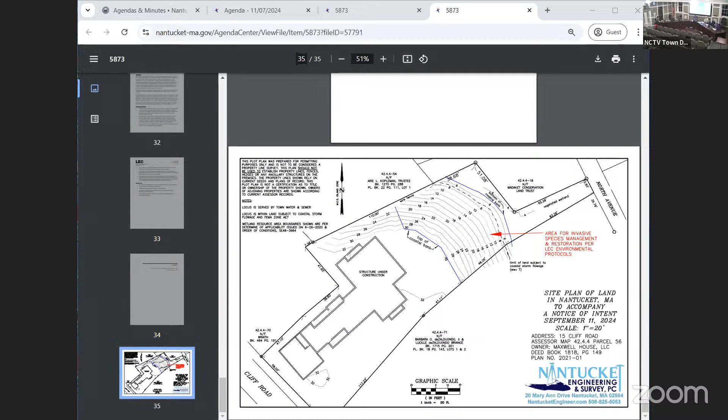Brian, good evening and welcome. Good evening, thank you very much. For the record, Brian Madden from LEC Environmental Consultants. This project was opened up. It's an invasive species management plan on a coastal bank, with some minimal invasive species restoration work within land subject to coastal storm flowage in the buffer zone to an offsite vegetated wetland. I think I had presented this two meetings ago, and we had continued

awaiting some feedback from DEP, which I understand Will had reached out and through some connections basically affirmed that an ecological limited project restoration is not really appropriate in this situation. I can get into more details on the management, but I think that's effectively what we were continuing to wait for DEP's feedback. Thank you, Brian.

So the feedback actually was sort of what you said, but it basically was that the commission retains discretion over projects to either hear them under the notice of intent or under the ecological restoration project, unless it gets flagged by DEP or meets the areal limits. So we certainly could hear this as a restoration project, but it's my opinion that if DEP doesn't require us to do so, there's no benefit, so we're going to allow this to proceed as a normal notice of intent. But the commission certainly does have discretion should it want to hear this project or any other project as a restoration project. It's up to them.

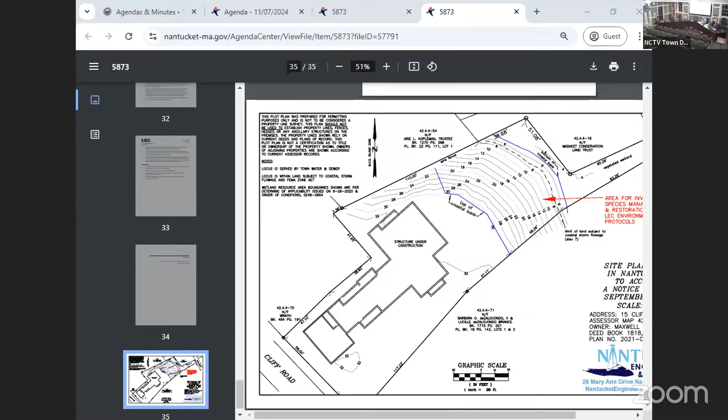Commissioners, anything else? Members of the public, any questions or comments? Seeing none. Brian, would you like to close? Yes, please.

Staff, do we have everything we need to close? Yes, you do. Is there a motion to close? So moved. Thank you, Mike and Joe for the second. We're all here in person, so we can do a vote just in favor rather than roll call. So all those in favor, please say aye. Aye. Any opposed? That carries unanimously. Thank you.

You can also let me know for the record that Commissioner Williams has joined at 5:09. I think you got to pull that one up. All right, then you get to sit on that plastic thing, I think.

While that's happening, we're going to move on to the next notice of intent, which is Muabessac LLC at 20 East Lincoln Avenue, SE 48 3814, also represented by Brian Madden. Brian, you're back up. Thank you very much. For the record, Brian Madden from LEC Environmental Consultants.

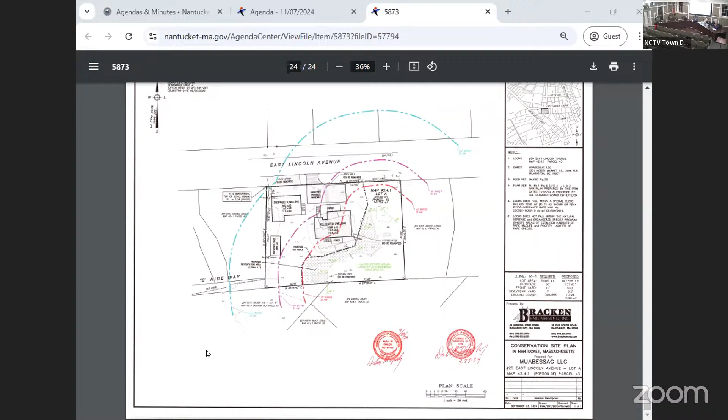I think, Jeff, I don't know if this is the most updated plan, actually, now I'm looking at it. Yeah, there's a supplemental plan where a patio was added. Exactly, yeah. All right, let's see if I can figure that out.

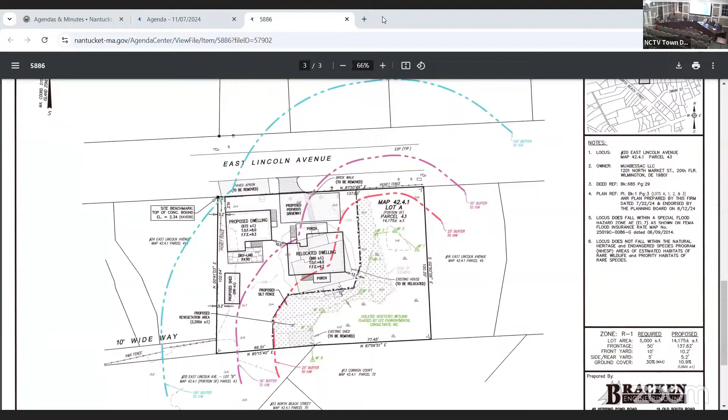There were some questions about the existing foundation and the reconstruction. The existing dwelling, and I included a photograph, has a first floor elevation at elevation 6. It has a perimeter crawl space, concrete crawl space foundation. There's some gaps or access points into the crawl space, but largely it's a block perimeter foundation. The back set of stairs and back porch is a solid structure of concrete.

What we're proposing to do is elevate the structure to meet zoning and flood zone standards. It's being elevated a little over 3 feet with the first floor elevation at 9.2. We're eliminating that solid concrete back steps porch area and the existing front porch, which is on sonotubes. The front and back porches will be elevated on sonotubes, and the foundation for the crawl space is going to be elevated.

There's going to be flood vents incorporated into the crawl space foundation, so the flood storage capacity and flood flow-through areas are going to be significantly improved under proposed conditions compared to existing. We've provided additional documentation showing the property will enhance the ability to absorb and contain floodwaters.

Again, we're increasing the wetland structural setbacks, reducing further the structural footprint within the 25-foot buffer, reconstructing the dwelling with flood compliant foundation, enhancing the flood zone interests, and providing 2,200 square feet of wetland buffer zone restoration enhancement. So I think we fit the waiver provision for the long-term net benefit, and we provided additional detail on revisions. I'll turn it over to questions.

Thank you very much. For the record, Brian Madden from LEC Environmental Consultants. This one was for proposed porch, reconfiguration of a stone patio, and reconfiguration of the existing driveway within the 100-foot buffer zone to BVW. Based on feedback we received at the last meeting, we've made some project updates.

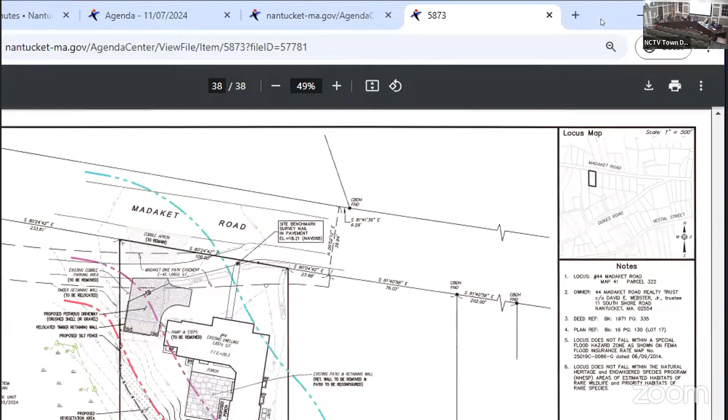We have another updated plan here. Basically, we were able to reduce the width of the driveway a couple feet. That pushed it off of the westerly property line and allows for an area where we're proposing a revegetated slope, on the west and south side of that driveway corner, upgrading the 25-foot buffer zone.

The original proposed timber retaining wall and the existing timber wall that's there right now is proposed to be removed. We've been able to regrade it in a manner that removes that structural element within the 50-foot buffer zone, but we are proposing to keep some edging along the perimeter of the driveway. Basically, that will contain the pervious material within the driveway footprint itself.

The driveway from south to north, moving towards Madaket Road, has a slight pitch towards the bike path, and we propose a dry well to capture any runoff before entering the bike path. That's in the northwesterly corner of the driveway. We are leaving a cobble apron within the easement abutting the bike path, as discussed at the last meeting. That's shown on the revised plans.

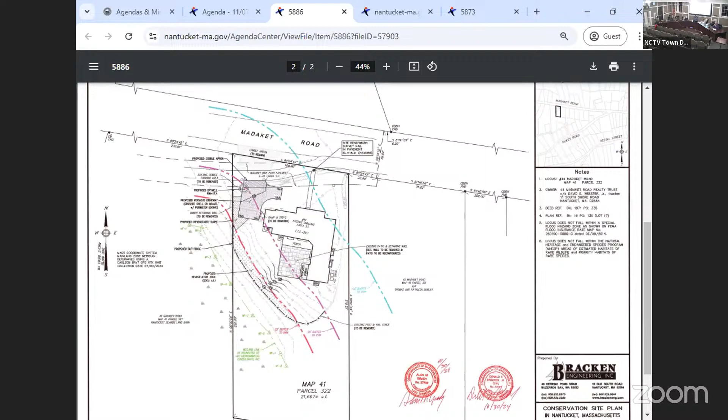Thank you, Commissioners. Linda, go ahead. I think I mentioned it last time, Brian, that you have to have an apron on both sides of that bike path, and you're not showing that. We are maintaining the cobble apron on both sides. Right, because it's just not shown here how you're getting from the north side of the bike path to the street. You can maybe zoom in up there, but I tried to do it here, and it got blurry.

It's complicated to see because the stippling isn't that different, but there is a cobble at the top, and then there's a cobble on the south. I just wanted to make sure. Yeah, we did look into that. We did incorporate it. So that transition against the bike path, there's cobble, there's that cobble apron.

Other commissioners? Seeing no questions or comments. Any questions or comments from members of the public?

Seeing none. Jeff, do we have everything we need to close? Yes, you do. Brian, would you like to close? Yes, please. Is there a motion to close? So moved, Mr. Chairman. Thank you, Linda. Is there a second? Thank you, Mike. Let's just do the voice vote. All those in favor, please say aye. Aye. Any opposed? That carries unanimously. Thank you, Brian. Thank you. All right.

And that will move us on to Madaket Land Trust, various properties, SE 48 3813, represented by David Haines. Good evening. Thank you all. Again, David Haines with Haines Hydrogeologic Consulting, representing the Nantucket Land Trust.

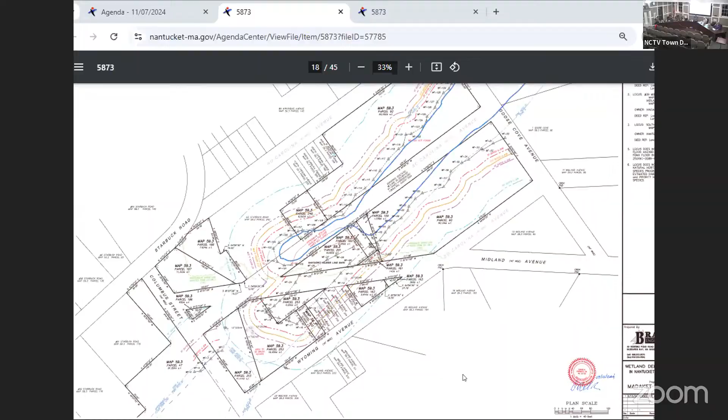Thank you, David. Any questions or comments from members of the commission? Seeing none, any questions or comments from members of the public? Also none. Jeff, do we have everything we need to close?

Yes. David, would you like to close? Yes, please. Is there a motion to close? So moved, Mr. Chairman. Thank you, Linda. Is there a second? Second. Thank you, Joe, for the second. All those in favor, please say aye. Aye. Any opposed? Abstain? That carries unanimously. Thank you. Thank you as well.

So now we'll be moving on to Nantucket Islands Land Bank at 19 Wauwinet Road, SE 48 3818, represented by Liz Phelps, and I think we need to promote her to a panelist.

Thank you, Mr. Chairman. Can you hear me okay? Yes, we can. Good evening. Good evening. Liz Phelps representing Nantucket Islands Land Bank on this application for 19 Wauwinet Road.

This is a 3.3 acre site that the land bank acquired in August of 2020. It was historically part of the Eat Fire Farm, Eat Fire Spring Farm that once comprised over 300 acres in the area. The area was subdivided in the 70s and residences were built. The land bank got a permit to complete restoration work at the site under SE 483560.

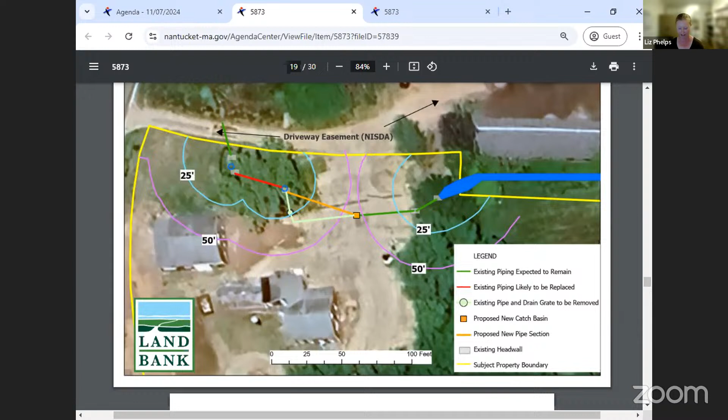That was for demolition of some structures, landscaping, and ADA accessibility. And then we obtained a second permit, SE 483636, to allow Fogtown Farm to operate a small scale lavender and berry farm at the property.

This application is requesting the repair of existing stream culverts on the site, which have increasingly become overwhelmed during high precipitation flooding events and require inspection and repair. Resource areas on the site consist of BVW and inland bank associated with the stream.

If you go to figure 2, Jeff, you can see the existing conditions. The stream basically comes off of the eastern wetland complex onto the property and flows adjacent to the NISDA barn into the culvert system on the western portion of the land bank site. It then daylights at two locations known as Eat Fire Spring, and from there is diverted again beneath the NISDA easement to a BVW. This system has been in place for many years, and it facilitates farm equipment moving from the site to the northeastern fields via the NISDA easement. There would effectively be no way to do that without that culvert system.

There is no natural heritage endangered species habitat located in the proposed work area, so no notification was required. And the area is not located within land subject to flooding.

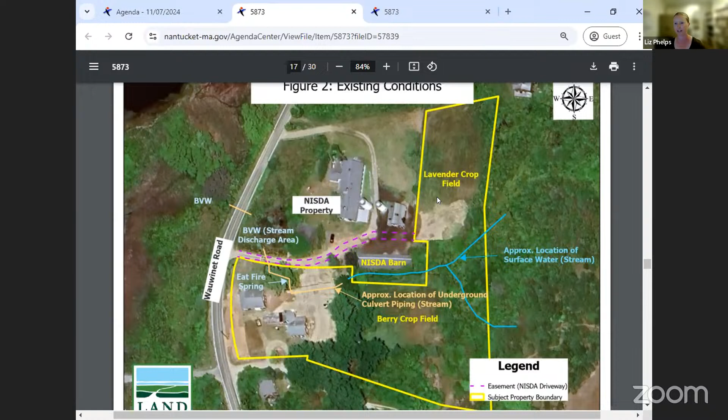So we're requesting this permission. If you want to go back down to figure 4, Jeff, we're going to leave but inspect the green sections on the property, not on the NISDA section, and then replace the red section. We are proposing to remove the section that's in light green. We would have to replace that anyway. There's a catch basin there and then piping.

We are proposing to replace it with the system shown in orange, which would be just a catch basin with a longer stretch of pipe that goes directly to Eat Fire Spring. That would eliminate maintenance issues and cause a better flow there, just a straight shot to the spring. After talking to Ernie Strang, he suggested that's the way we do it. So we're requesting permission to do that.

It's my understanding that this is a water dependent project, so I don't think we need waivers. But happy to answer any questions you might have.

Thank you, Liz. Any questions or comments from commissioners? We'll start with RJ, I saw his hand first. Thank you, Chair Engelborg.

I don't know, in looking at the definition of water dependent use, that this meets that standard, is my first comment slash question. My second one is to the other fellow commissioners: do we consider this actually a stream? Because there's a separate set of standards from Mass DEP with specific regulations when you're updating a culvert, like what the diameters have to be and how far down into the bed it has to be. So if we actually define this as it is in the narrative, as a stream, we should follow those regulations as well.

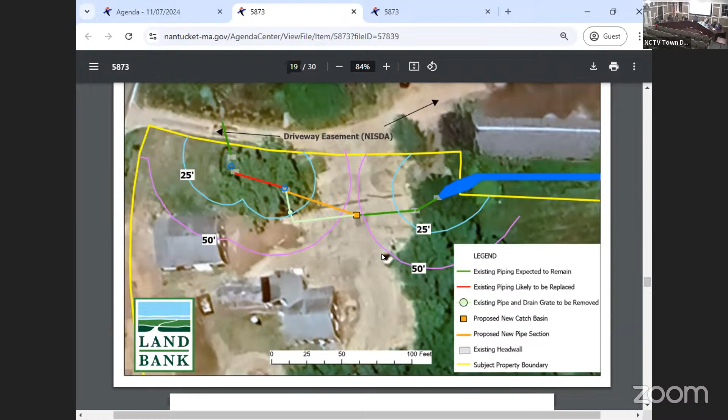Liz, would you like to close? Yes, please. So moved. Chairman, thank you. Is there a second? Second. Thank you, RJ. All those in favor, please say aye. Aye. Any opposed? Any abstained? That carries unanimously. Thank you. Thank you, Liz.

And next up is also Liz, representing the Nantucket Islands Land Bank at 181, 181R, 171R Hummock Pond Road. And you're up again. Thank you, Mr. Chairman. Again, Liz Phelps, representing Nantucket Islands Land Bank. This application is for our property known as Gardner Farm on Hummock Pond Road.

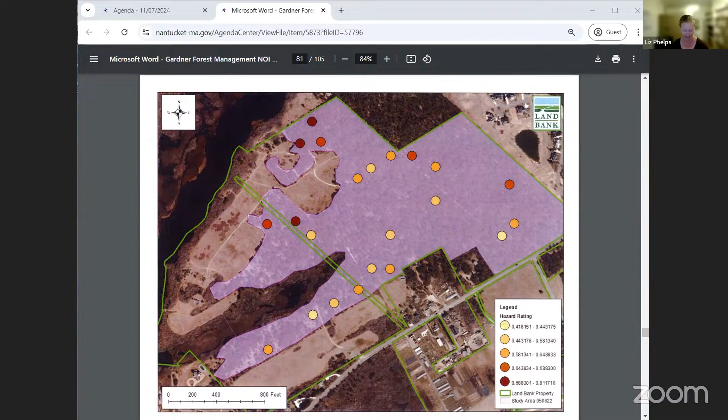The area is a conservation area consisting of trails and mowed fields. The land bank initiated conservation measures at the site last year, primarily in response to outbreaks or the threat of outbreaks from the southern pine beetle, or SPB. The pitch pines that dominate Gardner Forest are very dense and pose a high risk to SPB infestation. In addition, there's definitely a wildfire risk. Nantucket's Community Wildfire Protection Plan has identified Gardner as a priority management area where there's high fuel loads that should be treated.

SPB outbreaks have occurred on Martha's Vineyard as well as on NCF's Westgate property, which is less than a mile from Gardner. So the land bank has been working with Natural Heritage and with a licensed Massachusetts forester, Adam Moore, to develop a management plan for Gardner, basically for preventative tree thinning. We have submitted a habitat management plan to Natural Heritage for approval and a forest management plan to DCR for approval for this work. Forest plot surveys were conducted at Gardner, and from those surveys, Adam identified priority areas to be targeted. We've already done one phase that did not require ConCom permits because it was outside any resource areas.

Jeff, if you go to figure 2, you can see the areas that are subject to this application. It's primarily the western property, 181 and 181R Hummock Pond Road, but there's a very tiny part of the buffer that overlaps on the adjacent property, so we just included both properties. The resource areas on the site are marsh, bog, BVW transitioning to a wooded marsh.

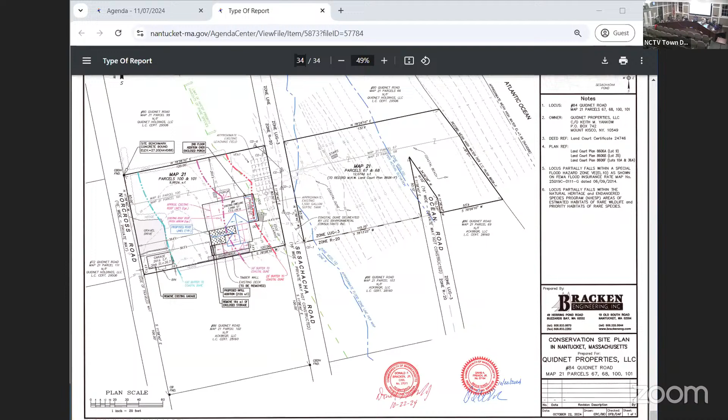All right, so that moves us on to Emirzian at 84 Quidnet Road, represented by Brian Madden. Thank you very much. For the record, Brian Madden from LEC Environmental Consultants. This project involves some structural improvements to the existing dwelling.

There's a coastal dune located immediately east that is flagged, and the 50-foot buffer zone goes through the central portion of the dwelling. What is being proposed is some series of vertical modifications to existing roof lines, some second floor additions over existing footprints. There's no foundation changes on that component, but the stippled area on the west central portion is proposed for a structural infill.

Right now there's an existing deck footprint in that location, and I included a photograph to show you what that looks like. But it's basically an entryway type deck into the dwelling that's proposed to be enclosed and become part of the dwelling. There's a small portion of the existing storage area, basically a connected shed to the dwelling, that's going to be removed, 16 square feet. And the garage up by the driveway is also being proposed to be removed.

That's just outside the 100-foot buffer zone. But the proposed structural infill, a small portion, does occur within the 50-foot buffer zone. There's new foundation work there to match the existing crawl space. So we are proposing a waiver for that work. It's about a little less than 60 square feet within the 50-foot buffer zone, on the west side, the landward side of the dwelling. That's not going to interfere with the functions of the dune. So we have requested that waiver.

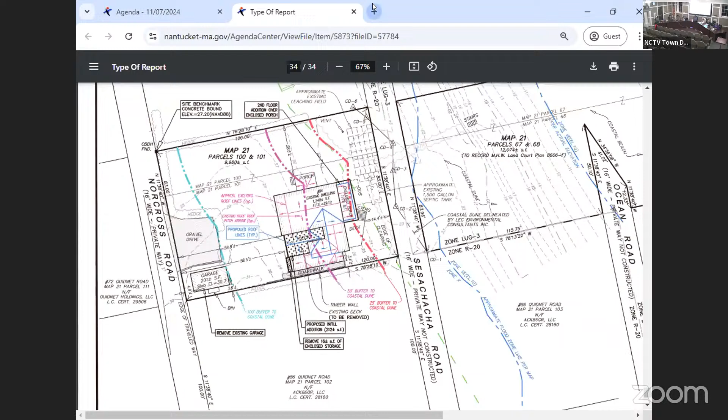Thank you. That will now move us on to Capri's Island Holdings LLC at 47 Crooked Lane, represented by Brian Madden. Thank you very much. For the record, Brian Madden from LEC Environmental Consultants. This one does not have a DEP file number. We are also waiting on natural heritage within the 30-day window, so we will be continuing. But the proposed project involves reconstruction of the existing single-family dwelling, the secondary dwelling, and installation of a new pool, patio, cabana, shed, garage, studios, and a septic upgrade, driveway reconfiguration, along with utilities, landscaping, regrading, and site work.

The proposed work activities occur within the 100-foot buffer zone. The wetland boundaries have been approved through a determination of applicability that was issued last year.

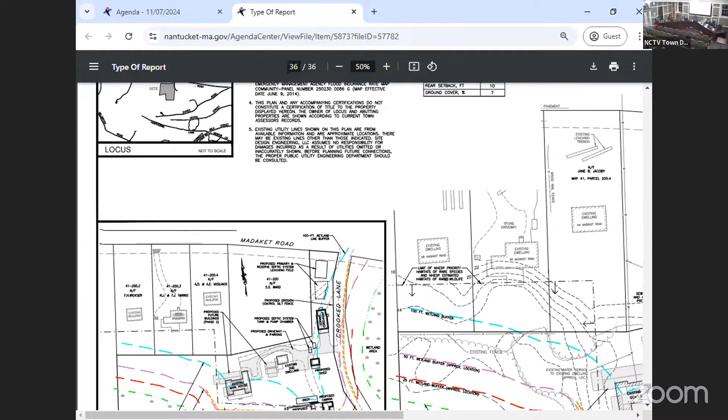The design has provided a good level of detail on the foundation depths and designs to ensure that we're 2 feet above high groundwater based on soil testing that's occurred out there. High groundwater has been documented between 9.3 and 9.8 elevation. So using the higher number, 9.8, I provided all the structural separations to the foundations, including the pool.

Which will also meet the 2-foot separation. The proposed work is all outside of the 50-foot buffer zone, with no structural components within it. The septic, located closer towards Madaket Road, is outside the 100-foot buffer zone. So no waivers are required for the proposed project, and I'd be happy to answer any questions.

Thank you, Brian. Any questions or comments from members of the commission? Okay, questions or comments from members of the public? Let's check the Zoom. Yes, please come up to one of the microphones, introduce yourself for the record, any connection you may have to the project, and then you can say your piece.

Hi, I'm Annie Mendelson. I have no connection with the project, I just was notified because I'm an abutter. I had a question about the pool being within the vegetated restricted area, and couldn't it be moved further north to be out of the vegetation area?

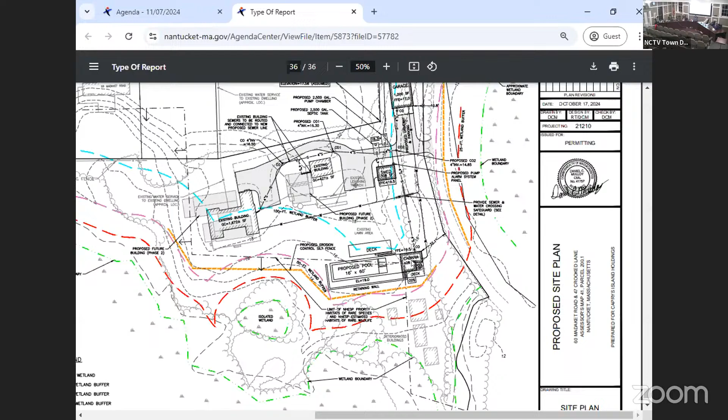Annie Mendelson again. Yes, go ahead. There's a driveway going to the Jacoby property that abuts this property. They have an easement in perpetuity, and it looks like they're planning their septic leach fields to be in that area, and I don't think you should be driving over a leach field. So I'm wondering what's going to happen with that. Yes, Mr. Madden, go ahead. Thank you. Yes, we are aware of the driveway easement, and the system is located north of it, so it's outside of the easement.

I would say too, there are plenty of leach fields that are underneath parking areas or driveways. We don't really have jurisdiction over what happens in the easement. That's more of a zoning issue, but I'm glad it's not in that area. But if it was, because that was the only location it could be, we've seen projects like that before. Jeff, go ahead. I would say that jurisdiction of leach field loading and things on top of that is within the discretion of the health department and Board of Health.

Okay, any other? Yes, go ahead, Annie. So sorry. No, you're fine. The leach fields are right next to the pond that's across the way, across Crooked Lane. And I'm wondering if there's any way they could be moved further away from the pond.

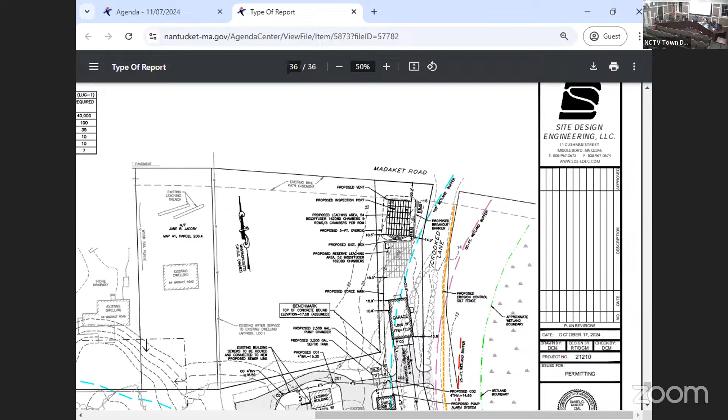Thank you. Any other members of the public? All right, so we assuredly don't have everything we need to continue on this one, or to close on this one. Would you like to continue to the 21st of November? Please, that will continue to November 21st. Thank you.

We'll now be moving on to Capri's Island Holdings LLC. No, we just did that one. Syracuse at 2L Street, represented by David Haines.

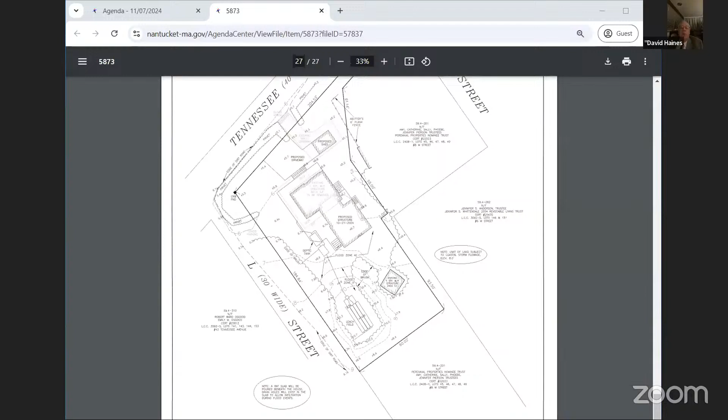Good evening again, thank you. This is 2L Street in Nantucket, right off of Tennessee. The proposed work includes removal of the existing house and construction of a new house and shed. Most of the work will occur within land subject to coastal storm flowage or its buffer zone. The site is outside of any natural heritage area, so no review by them is required. The site is on town water and has its own upgraded septic system, recently installed.

The house will be constructed above the flood elevation on a concrete foundation with flood vents and floor drains, 6-inch floor drains, 8 feet on center, discharging to a layer of gravel below a rat slab, so you will not lose any capability of infiltration or loss of flood storage. No great regrading is proposed of the site. The driveway will be reconfigured slightly, and all disturbed areas will be loamed and seeded upon completion of the work. The foundation will be a frost wall and a crawl space beneath the house, with no basement.

With that, if you have any questions. Oh, it does have a file number. We received a DEP file number today, SE 482821. The DEP system was pretty busy this afternoon.

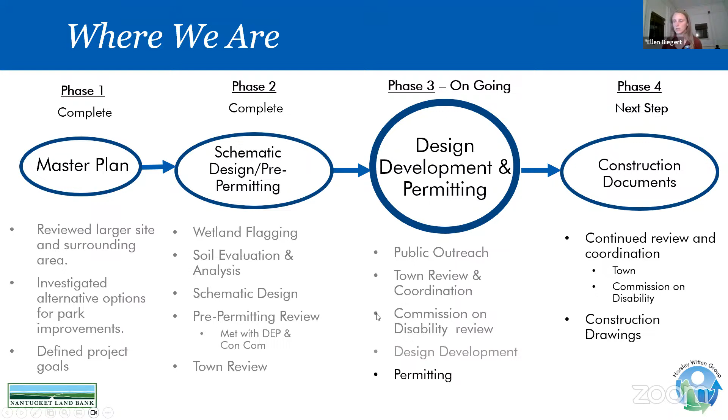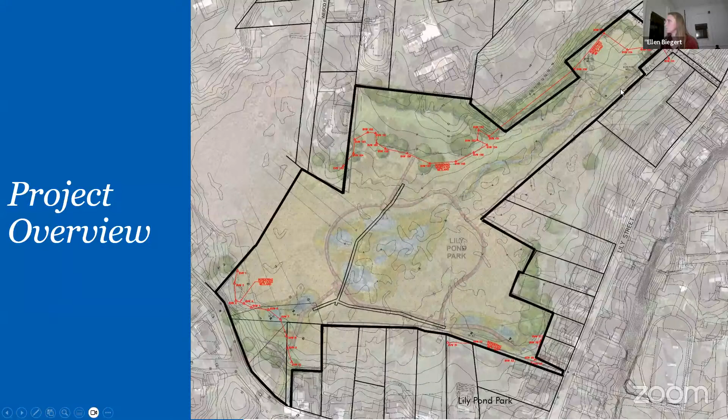So just some of the benefits: we would be looking to improve water quality. Like Rachel mentioned, currently the wetland is a location where a lot of the surrounding community drains into it. So at these points where it's draining into the wetland, we are looking to capture some of the water and clean it before it continues into the rest of the resource.

Habitat enhancement—creating more diversity in topography in the wetland so that we have some hummocks and standing water in these locations. And then access points and an accessible boardwalk into the wetland.

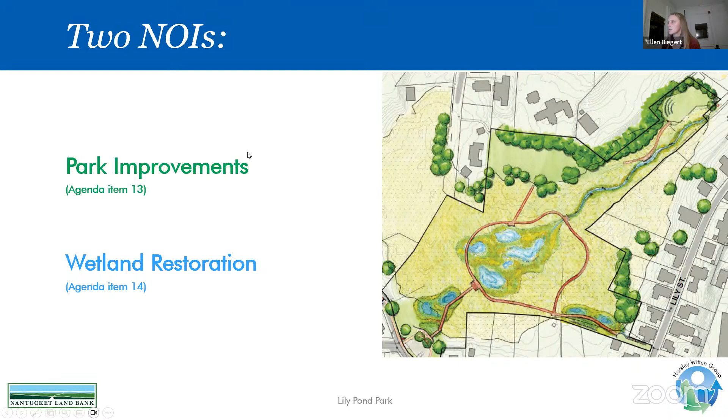Like we mentioned earlier, we are presenting for 2 NOIs within this one site, so we broke those down in the next few slides to explain them separately. For the park improvements NOI, this is really related mainly to the entrances and upland areas, as well as the boardwalk to get throughout the site. This isn't exact because there is some shared with temporary disturbances, but for the most part this is generally what's represented in the park improvements.

So, site access, the new trail system, stormwater management—everything we're capturing upland before we let it continue into the resource area—signage, and then wetland replacement.

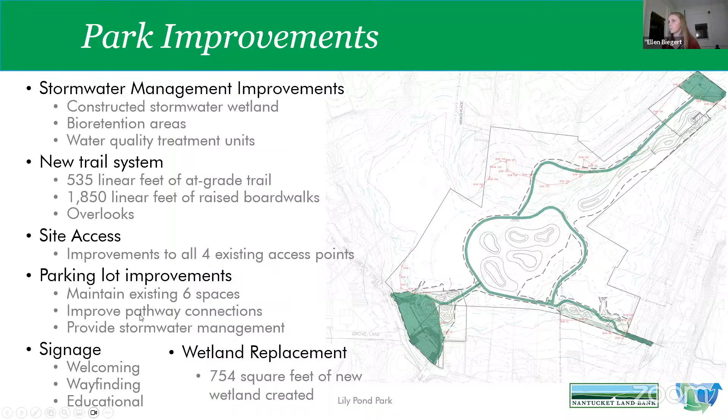And then the wetland restoration one, really invasive species management. So there's currently an NOI out for the invasive species management that's currently going on in the park, but this would be continued throughout construction and then monitored afterward, as well as the restoration area in the center.

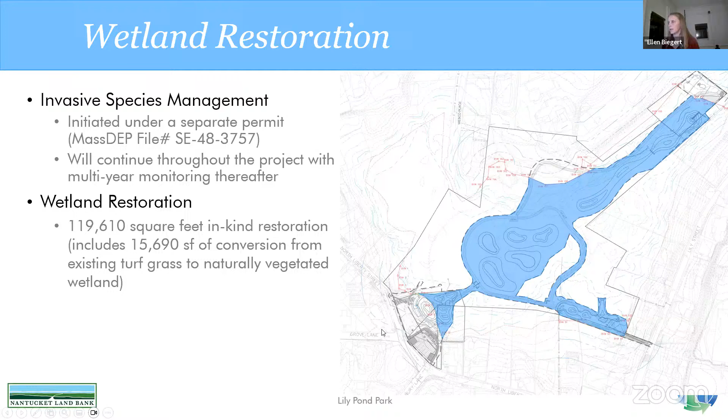And then I will pass it to Jamie. Thank you, Ellen. So as Ellen just broke it down for the different activities for each NOI, the reason for their separation is because the impacts for restoration exceed thresholds. So for those to be filed in accordance with the Wetlands Protection Act, they need to be filed as an ecological restoration project. However, the entire project overall does not qualify as ecological restoration. The park improvements elements, as Ellen just described, are under that separate NOI for that reason.

So some of the temporary impacts, as you can see with constructing the park improvements, are going to be applied to both projects. And since both projects need to have some temporary impacts due to construction access, material stockpiling, those impacts are split between the two. And then permanent impacts specific to park improvements are listed in this table below. You'll see that the bordering vegetated wetlands impacts will permanently impact 694 square feet, and that is why there is a wetland replacement area for 754 feet, which exceeds the 1-to-1 mitigation ratio required under the Wetlands Protection Act.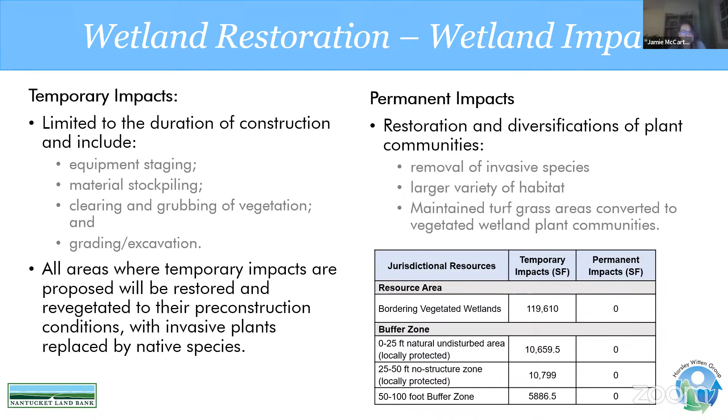And there's been a lot of mitigation measures, including the project planning that Ellen described up front. A lot of instruction, a lot of comments went into the design of this project so that it met the needs of the community and also the regulations under the local commission and at the state level. The construction period measures we will be implementing include erosion and sediment controls, pollution prevention measures, tree protection measures, and invasive species management as additional mitigation that's going to really enhance the overall site's functionality, both ecologically and for wildlife at the site.

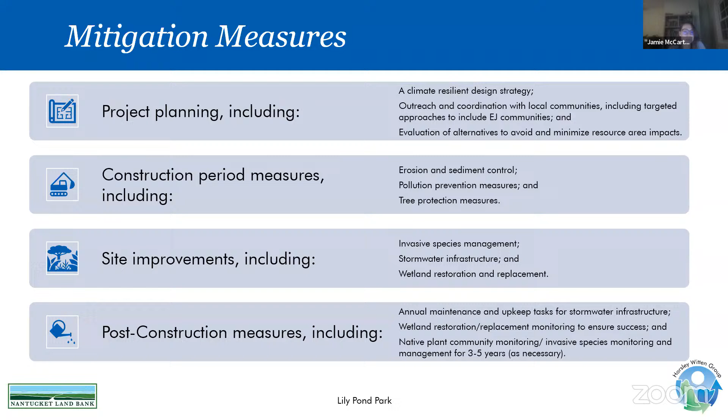And there will be post-construction monitoring as well, to ensure the success of all the native revegetation, including within the wetland replacement area.

And so this is our overall timeline. The invasive species management has been underway since September 2024, under the previously approved NOI. That will continue throughout the length of this project and into post-construction. Wetland restoration will be next, followed by the stormwater management, followed by the trail system, and then ultimately the site stabilization. This timeline will include a 3-month break during the busy summer months so as not to interfere with tourism.

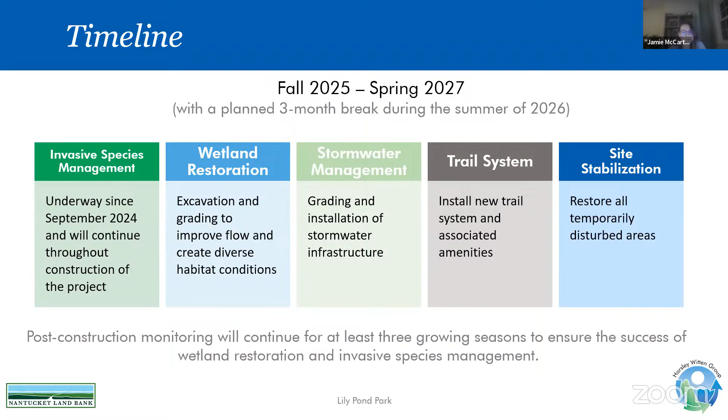Okay, so with that, I think we can go ahead and open it up for questions. Thank you all. Questions or comments from members of the commission?

Yes, Mike, go ahead. Just a comment. Looks like a great project, and glad that things will be improving in Lily Pond Park.

Thank you. Yes, Tim, go ahead. Maybe a dumb question, but tell me about how the water is treated and what you're trying to improve. I'm just curious.

Yeah, so for the most part, what we're using to treat it is hydrodynamic separators or treatment units that'll be underground. There is one at the end of the parking lot.

Pull up a plan, just reshare. So the plans that were submitted have been advanced since this one, but for the most part, at the pipes coming into the park off of North Liberty Street, there are some underground treatment units that will help with some of the sediment and pollutant, as well as coming off of Lily Street. For North Liberty, the parking lot is sent into a bioretention area, and then water for the smaller storms that go through the separator will also go into a small constructed wetland before overflowing. And then larger storms, when the constructed wetland, which is just uphill of the existing wetland, will continue out to where it is going right now.

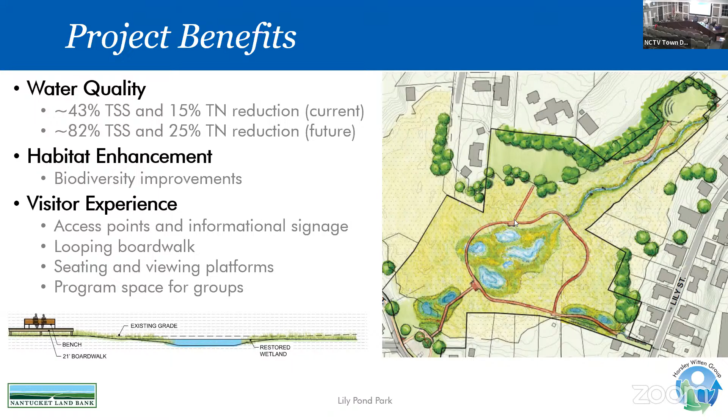Right now, all of that area is wetlands. I mean, it's just wet, and the water goes everywhere. So all of a sudden, if we're now funneling it down to the Lily Ditch, and it does not have the capacity to do that in a very big storm, then it's going to flood all of those properties. And that shouldn't continue to be our problem as homeowners there. So I don't really know what the answer is.

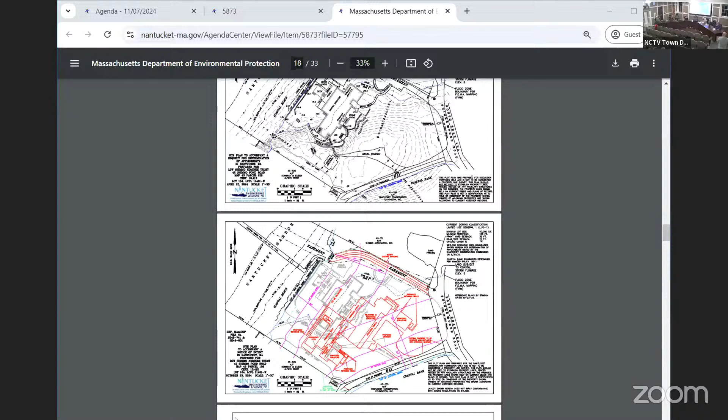Art Gasbarro, Nantucket Engineering. I'm before you tonight with a notice of intent application for a residential redevelopment project for a property at the north end of Shimmo Pond Road, fronting on Nantucket Harbor. This particular property has been residentially used and developed since well before the enactment of the Wetland Protection Act.

On the plan shown in front of you, on the northwest side of the property, we have the harbor, coastal beach, and then coastal bank. On the southeast side of the property, on the opposite side of an existing paved driveway, is a coastal bank, a heavily vegetated landform that comes up from Pest House Pond and is a jurisdictional coastal bank by policy 92-1. All of the resource areas we're discussing tonight have already been reviewed and approved under an earlier determination of applicability by the commission.

The property also contains land subject to coastal storm flowage, the boundary of which essentially runs through the middle of the house and up along the existing driveway on the northwest side of the property. What we're proposing to do is to pick up that existing house and move it to the southeast, up to a higher portion of the property, getting it out from within the current 50-foot buffer zone, removing it from the flood zone, and then renovating and improving that house.

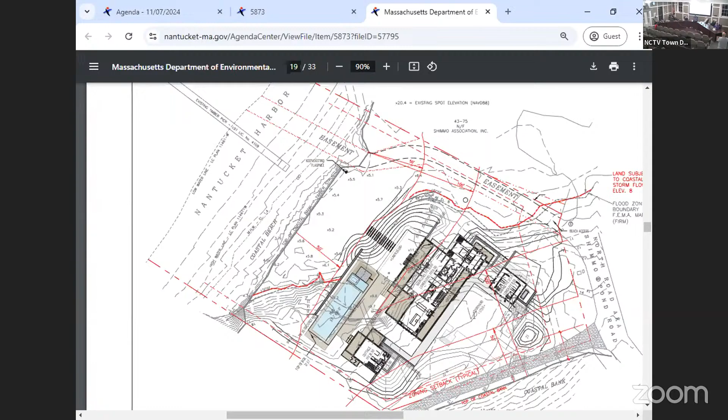No, Mr. Chairman. If you were to flip back, the proposed silt fence limit of work is shown in green on my plan, and we have held that. I'm sorry, are we talking about there's 2 driveways—perhaps that will help. There's the driveway within the easement on the northwest side, and no, that all exists. That's actually getting reduced from what is gravel right now—that little strip you see down the middle would become grass, with shells or shell gravel mix, compared to what's all gravel right now. It's actually getting a little bit narrower, so it's not getting any closer to the resource area. That's an existing beach access way—it's where it dumps, but it provides access, pretty much on that northwest side at grade there.

Okay, thank you. Other commissioners? Questions or comments from members of the public? Seeing none. Art, you said we don't have everything we need to close? We're waiting on a file number. Okay, yep, so I don't have one. Would you like to continue to the 21st of November? Yes, please, I will continue to November 21st. Thank you. Thank you as well.

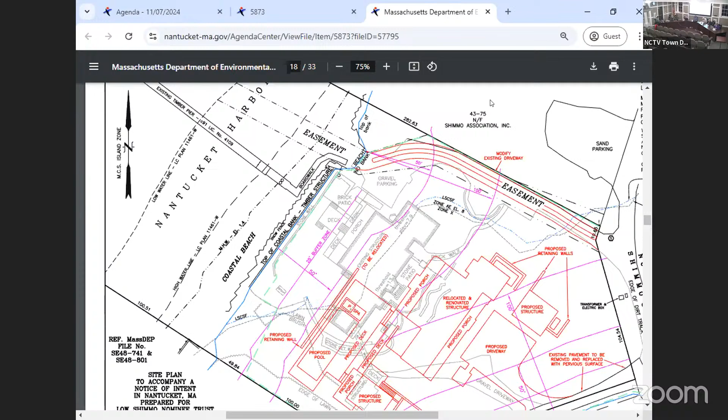Paul, good evening. How are you? Good evening, thank you. For the record, Paul Santos with Nantucket Surveyors, on behalf of the applicant, Sayle 99 Washington LLC, for a property located at 103 Washington Street.

About three or four years ago we were before the commission and did some improvements involving the addition of a loading dock and an exterior cooler, both completed. Subsequently a COC was issued by the Conservation Commission, and we are now back with this new notice of intent.

The plan is to do some upgrades to the property. I'll start at the westerly side of the building. The front entry porch, what is now the front entry when you walk into the building, the intent is to enclose that area. There are architectural plans in the set too that I'm sure you can take a look at, but the intent was to enclose that front area.

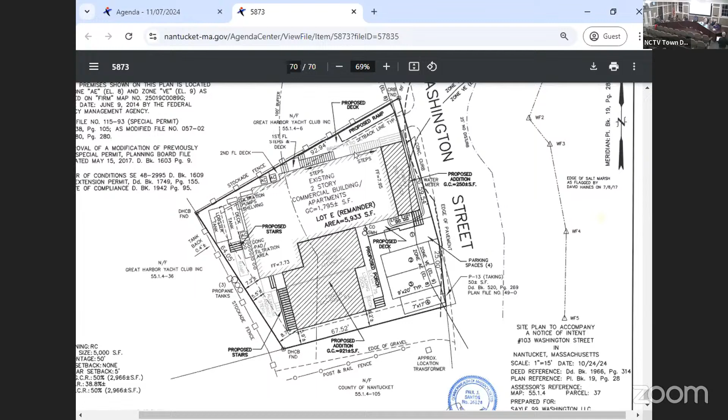Thank you, Paul. Questions or comments from commissioners? Okay, questions or comments from members of the public? Seeing none, do we have a file number for this? I'm tracking it right now, and as of right now I still don't have any confirmation that I do, so.

Would you like to continue to the 21st of November? I would not like to, but I'm going to be forced to, so yes, we're happy to continue. Well, sorry to ruin your day. That's not your fault. DEP is going to make you continue, I think there's been a switching of the signing for the 21st, so everyone we usually go to today was not available. So we've got someone else now, we'll start tracking when this happens again.

All right, well this will continue till November 21st. Thank you. Okay, thank you. That concludes the notices of intent.

We'll move on to amended orders of conditions. I'll start with Waterfront Pocomo LLC at 17 Lauretta Lane, SE 48 3542, represented by Art Gasparrini.

Thank you, Mr. Chairman. Arthur Gasparrini, Nantucket Engineering for the applicant. Perhaps if we could have the plan up, I think it might be helpful. I am in front of you to request an amended order of conditions, and I tried to use some colors on the plan, which you probably see in your packet, to hopefully make clear what's happening here.

Essentially, we had an approval and order of conditions for the removal of the existing structures and construction of brand-new residential structures. Instead, the applicant would like to continue to use the structures, not remove them. The approved features are shown in magenta, the existing are shown in gray-black with cross hatching around them, and the proposed changes are shown in red.

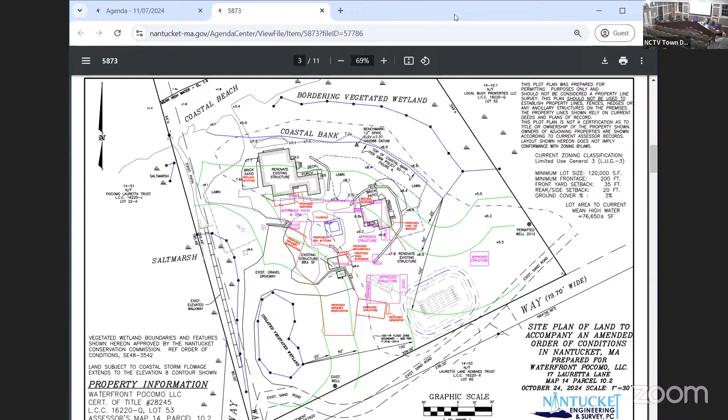I was a little torn, honestly, on the new application versus doing this as an amendment. My sense was that it remained a residential sort of redevelopment project, and it was so much because we were going to a lesser intensity of work, but it still was related to essentially residential redevelopment, if you will, that that was the appropriate way to do this. My concern at this point with a new notice of intent is the timing that would lead into, and I would respectfully wonder what really would be the difference in what comes out of the commission. The applicant would get a benefit of more time, perhaps with a brand new application on the back end of the permit, but that's really not what we're looking at with it being minimized.

And I believe the same conditions, I saw that Mr. Carlson just had it up. I have the previous order here from before as well. And I believe all of the limit of work hasn't changed, if that also helps you, Mr. Chairman. We have not expanded at all what was the approved limit of work. So we're working essentially inside of what was the approved silt fence. So I think we'd go through all this other process, another set of filing fees, notices, time back on your agendas. And I think the order of conditions that you would issue would have the identical conditions of what this amended order would contain, would just be my take. So I'm not sure, respectfully, what the benefit would be of that.

Thank you, and I understand the reason it was filed this way. I've already said my piece, so I'll go to the commission's discretion. Maybe we'll hear input from staff too, and then we'll make a decision, but I agree it could be heard this way. I just don't know if it's the best way to proceed. Jeff, go ahead.

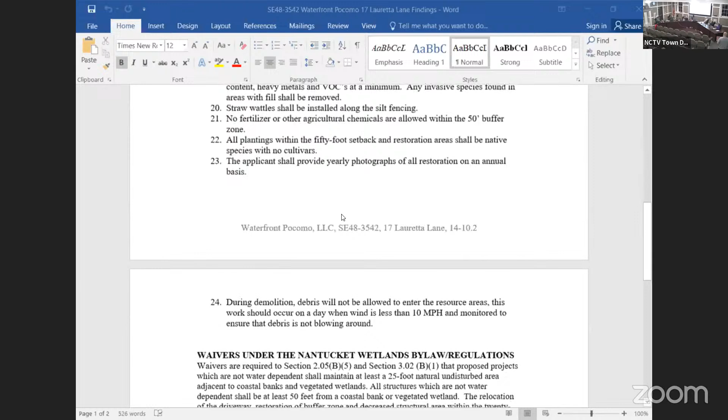Sorry, let me just get that out of the way. So we had the permit overview before, which describes the work. The only finding of interest was that no coastal engineering structure of any kind shall be permitted on an eroding bank in the future to protect the project allowed by this permit, except those allowed by waiver. I won't go through everything. As far as conditions go, pretty standard conditions for us. I think the interesting part here is, I mean, it's old enough. Well, I think 24 is fine.

The waiver, obviously, if we look at the amendment that's here, references sections that don't really exist anymore, which can be updated to correct those. As far as the difference between an amendment and an NOI, for my input on that, I definitely hear what everyone's saying. I think if it's helpful for everybody here, the difference between the two is pretty minor, right? So when you do an amended order of conditions, you notice the abutters, you have a requirement to advertise in the paper, and there's an appeal period at the end, specific only to the elements included in the amendment. Under a new notice, obviously, everything would be appealable.

I think some of these are splitting hairs. I kind of agree with Art personally that a cleaned up plan that just shows the new elements only would be helpful. I also hear what Seth's saying too, that it's cleaner. Sometimes it's not always clean. I'm happy to answer any other questions too. Yeah, Linda, go ahead.

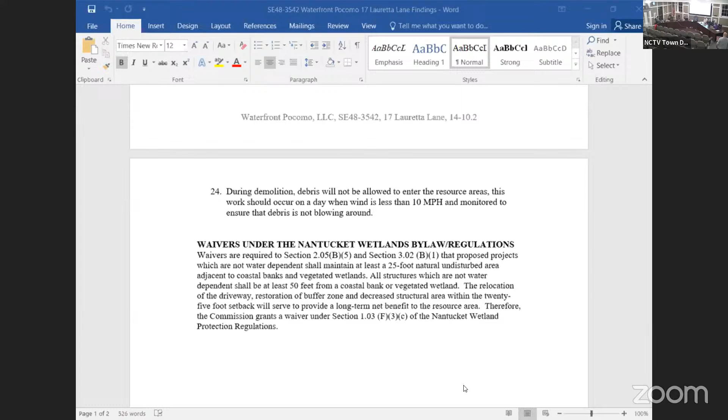One question, go ahead. Mr. Chair, will this site visit, because of daylight savings, be at 3 o'clock? Yes, we know we can work this out, but just so we're clear, 3 o'clock. Okay, thank you. I wish daylight savings time got abolished, but unfortunately, we're not there yet. My kids and pets agree with abolishing daylight savings. So I would request a continuance to the 21st and the site visit. Thank you. Yeah, the site visit will be on Monday, the 18th at 3 p.m.

We'll see you there. Thank you.

And we'll continue this application to the 21st.

That being said, we'll move on to Squam Partners LLC, 89 Squam Road, SE 48-3674. Still represented by you. Thank you, Mr. Chairman.

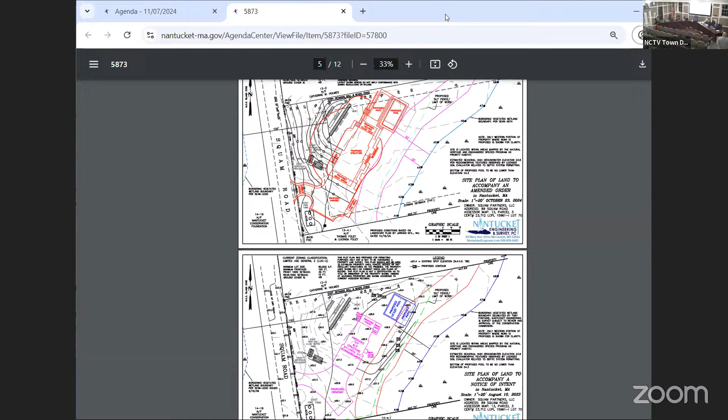So this project is essentially residential development on the west side of this property, where we had approval for a cottage and a swimming pool. The amendment is basically a refinement that has occurred in the design process since the initial application was approved. The residential structure itself is the exact same footprint. The swimming pool got a little bit larger but remains outside of the 50-foot buffer zone. The bottom has not gotten any closer to groundwater, so we are maintaining the same elevation as what was previously approved.

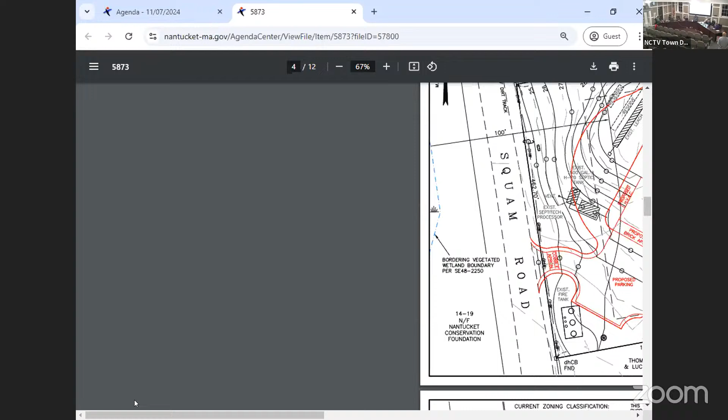The driveway got, I guess I would call it improved, refined, so that it will actually work. We essentially had an architectural design and not a landscape design when we did the initial permitting, and they brought in a landscape designer. The extent of the work, the silt fence has not moved. Again, I thought this was appropriate as an amendment and not a minor mod, to talk about that distinction, because of the change in the size of the pool. That was really the driving factor in my mind as to why I filed it this particular way.

I think we also had filed a landscape design plan as well. So this plan shows your structural elements, again, remaining outside of the 50-foot buffer zone. With that, I'd be happy to address any questions or concerns.

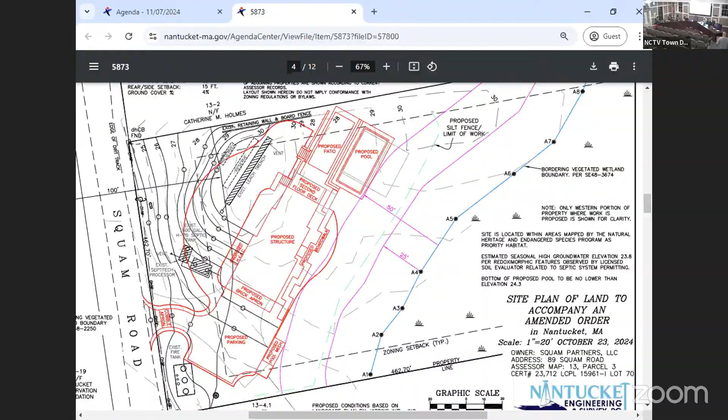Questions or concerns from commissioners? Okay, questions or comments from members of the public? Seeing none, is there a motion to close the hearing and issue the amended order of conditions? So moved, Mr. Chairman. Second. All those in favor, please say aye. Aye. Any opposed? Any abstain? That will carry unanimously. Thank you. Thank you as well.

Now we'll be moving on to the public meeting. We don't have any requests for determination of applicability tonight. We'll move on to minor modifications. We have 39 Monomoy Road LLC at 39 Monomoy Road, SE 48-3657, represented by Brian Madden.

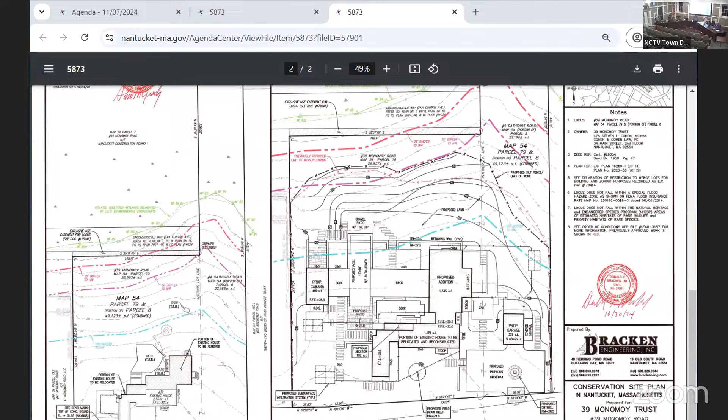Thank you very much. For the record, Brian Madden from LEC Environmental Consultants. This was an order that was issued in July 2023. Work is ongoing, and the proposed project updates include reconfiguration of the approved patios, decks, pool, retaining walls, along with some corresponding regrading and landscaping updates. All structural work is outside the 50-foot buffer zone. And that basically reviews it all.

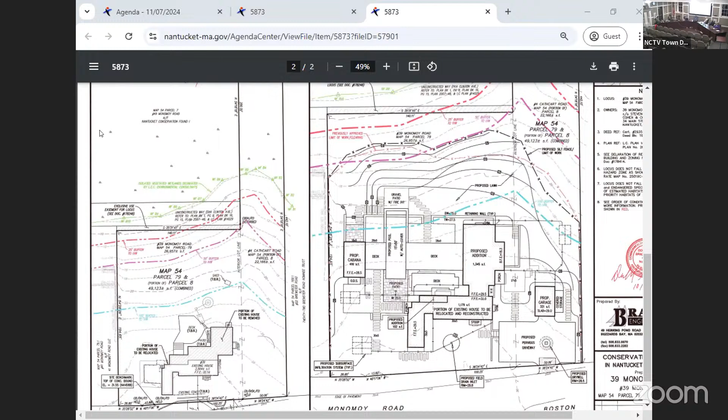Turn over to questions. Any questions or comments from commissioners? Would somebody like to make a motion to issue the minor modification? So moved, Mr. Chairman. Second. All those in favor, please say aye. Aye. Any opposed or abstained?

That will carry unanimously. We'll move on to the Ocean Avenue Nominee Trust at 20 Ocean Avenue, SE 48-3777, still represented by Brian. Thank you. Brian Madden from LEC Environmental Consultants. This was an order that was issued June of this past summer.

For proposed site improvements within the 100-foot buffer zone to coastal dune. Project updates include reconfiguration of the approved retaining walls, relocation of the AC units on a gravel pad, and relocation of the outdoor shower, along with some corresponding regrading, utility, and landscaping updates. Again, similar, all structural components of this one are outside the 50-foot. I'll turn it over to questions.

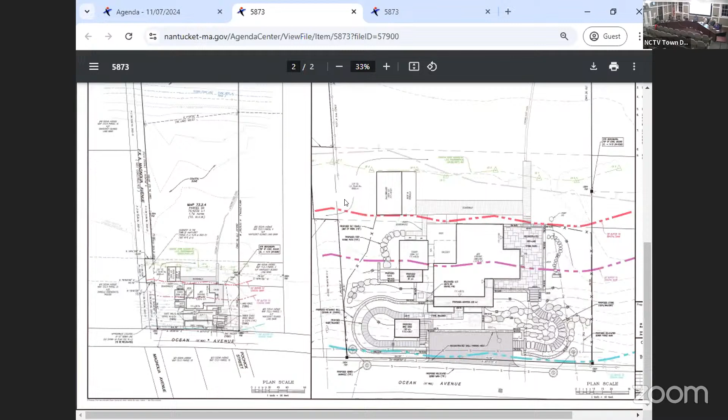Thank you, Brian. Questions or comments from commissioners? Would somebody like to make a motion to issue the minor modification? So moved, Mr. Chairman. Second. I think we're going to take Mike for that motion, second, and Linda for the second. All those in favor, please say aye. Aye. Any opposed or abstain? That carries unanimously. Thank you very much.

Thank you as well. And that will move us on to certificates of compliance. Start with Jen Sankey Lighthouse Trust, 37 Sankaty Head Road, SE 48-3608.

Jeff, are you doing this? Yeah, I'll take it. All right, go ahead.

So this project was originally - I'm not talking into my microphone like I'm supposed to. So this project was originally for some renovation to the structure. Sorry, I'm just trying to pull up my notes. Back in the olden days, I could just remember, but I'm getting old.

This was for a pool and patio and a spa area and a slight relocation of the structure. The pool and patio were not constructed, and there's no desire to construct those. The rest of the work is done. The only minor change is that they shifted the spa on site slightly further south, and it moved it out of jurisdictional area, so we didn't make them come back for a minor mod for that. Other than that, we're recommending this can get issued, and with the pool being gone, those pool conditions don't need to be carried forward.

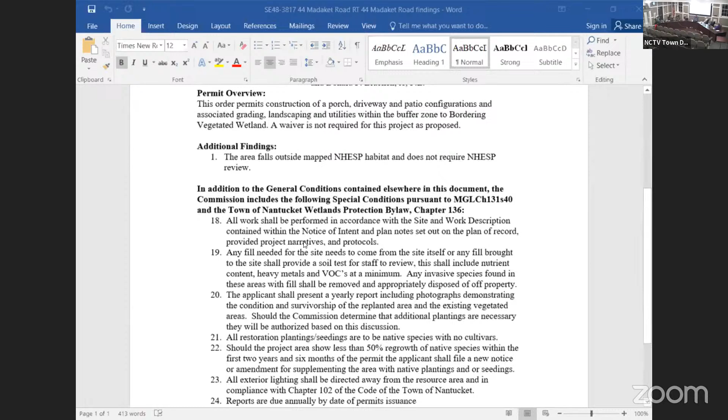Sorry, I don't believe that. I'm not sure about the drainage. No, I'm not either, because I think this requires waivers. Oh, yeah. And I am recused from this one.

Which one is this? 44 Madaket. I guess from our end, and I sincerely apologize for this, this is my fault for getting to it late today, so we have to deal with the switch. I guess I may just ask if we just carry this one forward and we'll deal with the corrected draft, because I agree, remembering that project, it did definitely require a waiver. Especially with the edging that's proposed and all that fun stuff.

Yeah, sorry about that. That may have just been in the midst of getting drafted when we switched humans. So we're gonna hear this one on the 21st, not the 22nd. Yeah, we'll have the correct draft. Sorry to Brian, it will be a little slow.

Okay, so then we'll move on to Madaket Land Trust at the various properties. And you want to put that up and go over this one?

There wasn't a lot of stuff on this one. Sorry about that, guys. Oh, you're good. Did I get the right one? No, I did not. All right, I feel better about that now, but now I need to go back to Zoom. And get the share right. Man, I need to just come and practice from time to time. I'm rusty.

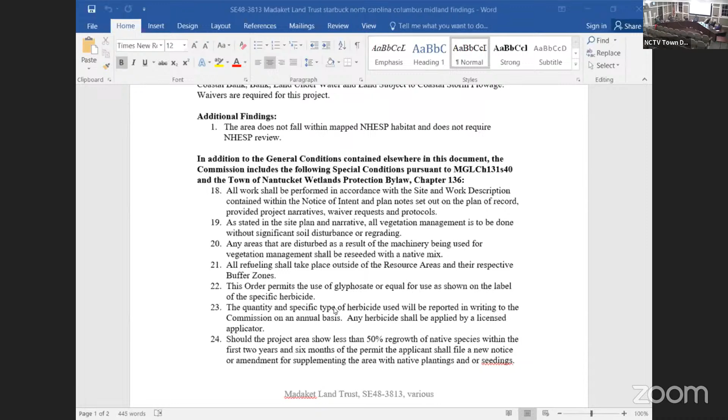So I know we've kind of done similar projects. We just want to memorialize that there's not to be significant soil disturbance. Any areas disturbed as a result of machinery need to be reseeded with the native mix, refueling outside of the resource areas and their buffer zones. Permits the use of glyphosate as requested with our normal herbicide reporting requirements. And then we included the 50% regrowth of native species just to keep track and make sure that any of those invasives don't come back in.

And then I feel like that's how it's more normally written, that all reports are required annually until a certificate of compliance is issued, then annually by the date of issuance or on the anniversary of the permit.

While he's typing that up, any other questions, comments, additions?

Is there a motion to issue the order of conditions as amended? So moved, Mr. Chairman. Is there a second? All those in favor, please say aye. Aye. Any opposed or abstain? Nope, that will carry unanimously.

Now we'll go on to 19 Wauwinet Road, the land bank, SE48-3818. Jeff, put it up and do the overview.

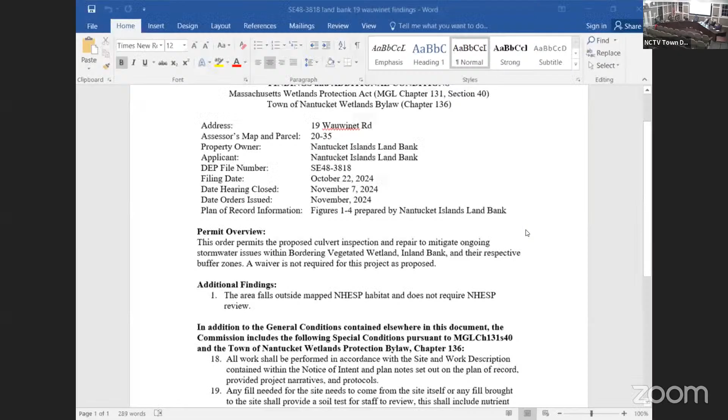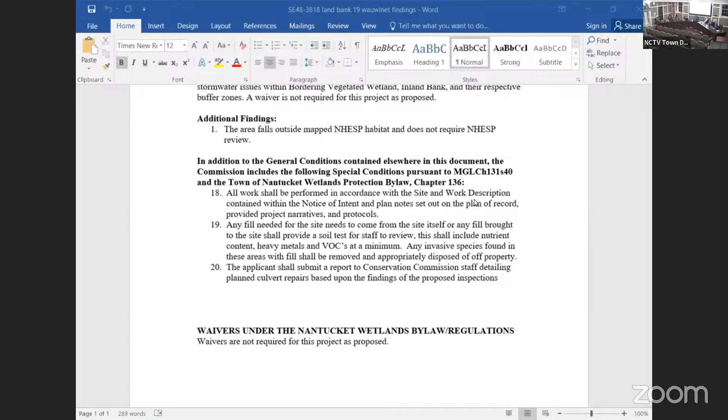So this was the culvert inspection and repair project, which I would love to have that discussion at a later date and time. We're definitely going to. But the only condition that I know Will had put on was to have a report detailing the planned culvert repairs, based upon the findings of proposed inspections. Open to any other findings or suggestions. Do we usually specifically say that we found it's a water dependent project, or we don't? We certainly can. We could wordsmith it really quickly. I know it came up in the hearing.

Anything else? He'll get there. Don't worry. That's just an R next to E. We do check all of these for grammar and spelling before we print them off finally, too, but.

Okay, anything else? Is there a motion to issue the order of conditions as amended? So moved, Mr. Chairman. Thank you. All those in favor, please say aye. Aye. Any opposed or abstain? Nope, that carries unanimously.

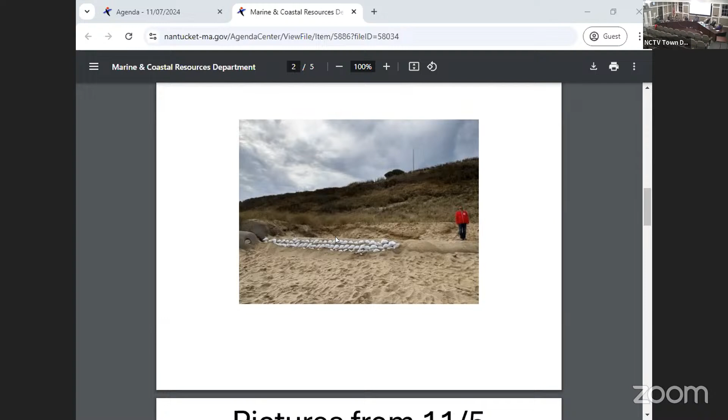I know we've been provided some information by the property owner at 63 that those bags came pre-filled. We've asked for, as you saw on the report, receipts and sand delivery receipts to justify that, and we were informed those couldn't be provided. They removed all of the sandbags as of this morning. They are all gone and removed, which is nice. But I think there's still some questions of where the sand came from, and the work that took place.

One of the added wrinkles to this is that, from plans from both the existing applications in this area and GIS, and our confirmation, the work is done not on 63 Baxter Road, but on the town-owned parcel adjacent to 63. So if we end up issuing something, we'll have to provide at least a copy or issue a similar order to that property owner as well. We can't order any mitigation or restoration work on a property without sending it to the people who own the property and having them engaged in that process to rectify this.

Like I said, we're definitely missing some information. I think our recommendation is to issue out some sort of enforcement order, obviously ceasing any work, as we indicated in our correspondence with them, but then also to keep that open until we can verify where the material came from, what exactly transpired, and then if further mitigation is needed or material needs to get replaced, how we're going to effectively do that.